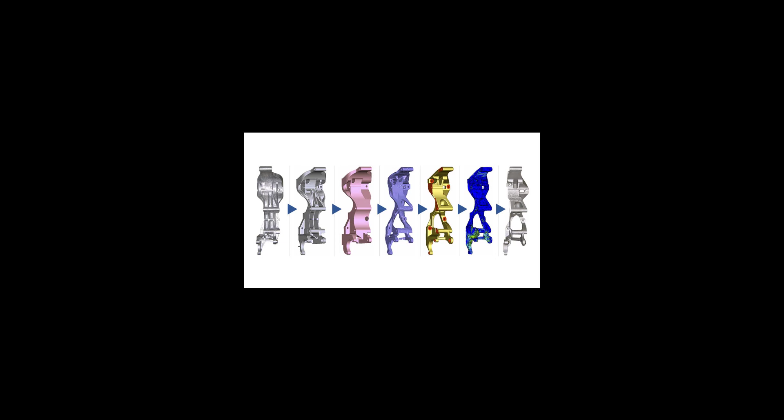Whether we're talking about a family car or a race car, a commercial jet, or the next rocket to the moon, weight plays a vital role in engineering. In most every possible design field, products and systems benefit from weight savings. Pounds taken off of a car mean more miles per gallon, or volt. A few ounces can be the difference between taking home the checkered flag or watching the celebration from the pits.

Weight off an aircraft means more paying customers or cargo, and a single gram taken out of a spacecraft means a cost savings of $1,000 or more. Even in everyday consumer products, an optimized design uses less material and thus is more environmentally friendly and can even cost less to build.

Altair introduced topological optimization with its OptiStruct solver in 1994 and won Industry Week's coveted Technology of the Year award. In the 28 years since, Altair's optimization tools have been the gold standard in lightweighting that have been copied but never equaled.

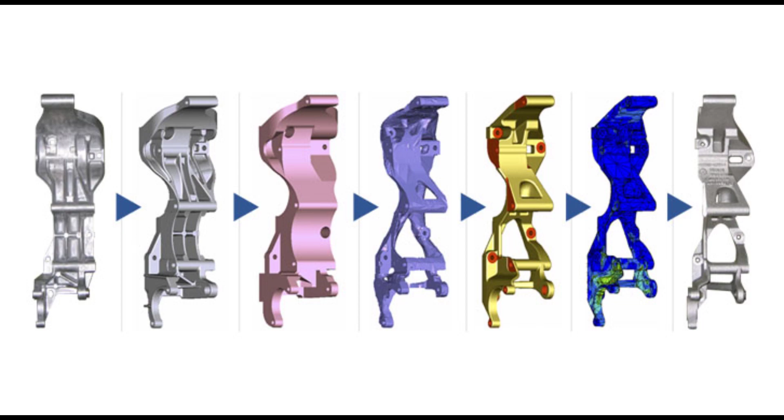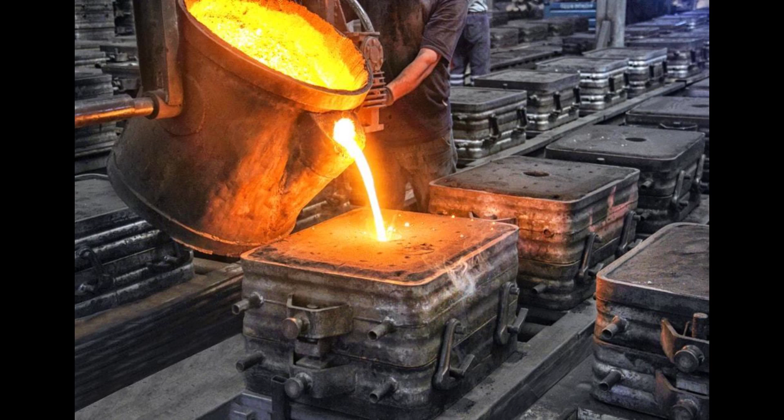The interesting thing about optimization is that it was a technology held back by the manufacturing techniques of the age. Design restrictions placed by manufacturing requirements meant the optimized designs were excellent and saved countless pounds of weight. But the true power of topological optimization was quietly waiting to be released.

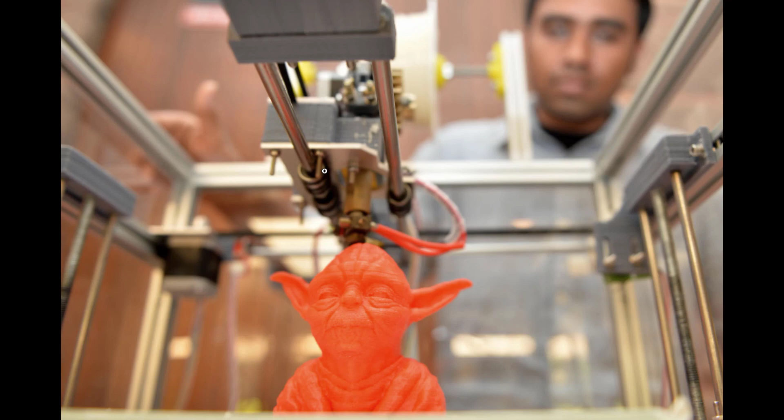Fast forward to the early 2000s, and 3D printing, additive manufacturing, is seeing its heyday. From the early days of FDM Yoda heads and embedded gear systems coming out of desktop 3D printers, to modern-day titanium SLS printers, additive manufacturing has finally unleashed the true power of topological optimization.

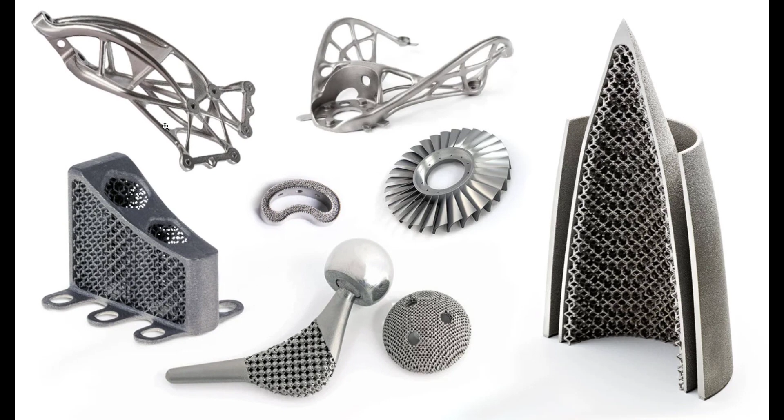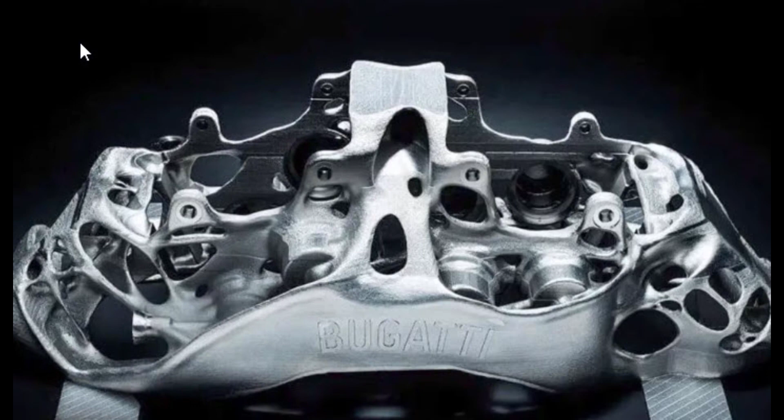Finally, the organic and revolutionary designs coming out of Altair's optimization codes could be realized in metal 3D prints that could never have come out of traditional manufacturing technology. As 3D printers became larger, faster, and more technologically advanced, you will be able to see more and more optimized parts in everyday products, on the roads, in the skies, on the trails, ocean, deserts, and even in your homes.

So now that we have an understanding of what optimization is, and why it's critical to the engineering process, why don't we take a look at how we go about doing optimization? Now this is just going to be a demonstration. We're not getting into the specifics of the utilization of the software.

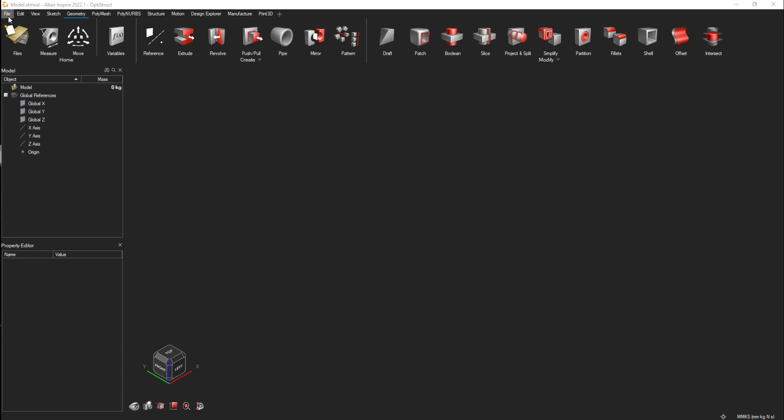In fact, let me come here and open up a model. So this is going to be the part that we're going to optimize. And you see it's just coming in as geometry, and we can support any of the geometries that are out there, all the popular CAD systems, the intermediate formats like Step, Parasolid.

And we're going to take this part and run it through a quick analysis just to see that this is a part that could be optimized, a better design through optimization. And then we're going to walk through the steps to do an optimization. So this is an aircraft door hinge bracket. This is an A380 part.

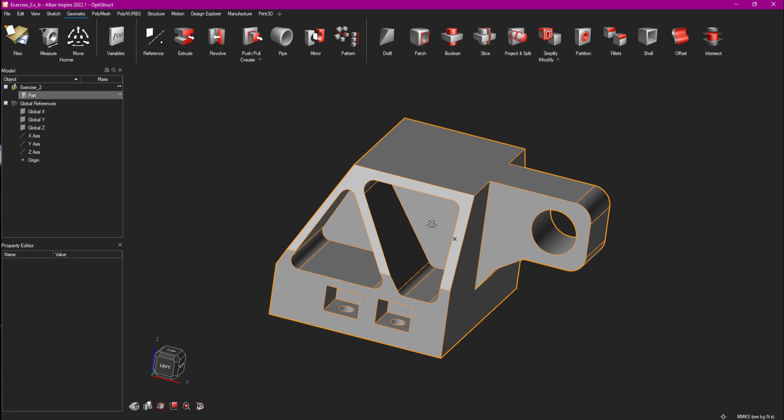And its job is to attach, two of these attached to the frame of the aircraft, two of them attached to the door of the aircraft. And then attached to this little cylinder here is the actual aircraft door hinge, which allows the door to open and kind of lean out and lay against the side of the aircraft.

So needless to say, it's an important part. And as with anything aerospace, weight is everything, and we want to make sure our parts are as light as possible. But also important to aviation is, of course, reliability. So we want to make sure the part is survivable. It will achieve whatever goals we're looking to set for it.

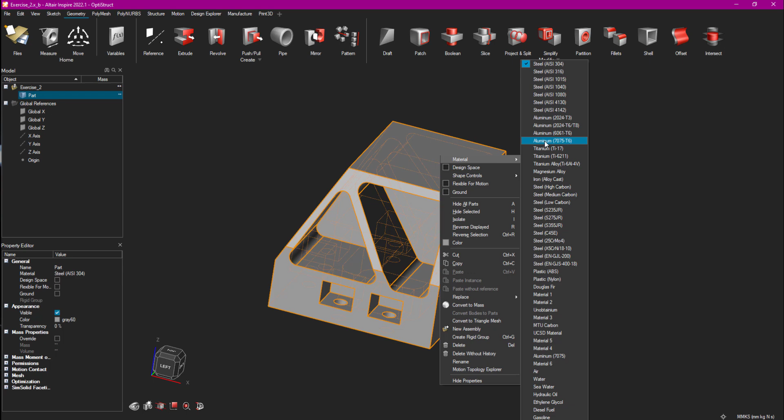So if I want to take this part and see where we are right now, what the status of the design of this part is, I can very easily do that in Inspire. The first thing I'm going to do is assign a material to it. We have an entire list of materials here. I'm going to select one. We can add materials as well if we so desire. But I'm just going to select aluminum 7075 T6, a very popular aviation grade of aluminum.

And we can take a look now and see what the mass of our part is. We're looking at about 1.5 kilograms. If we wanted to see that in pounds, we could just very easily change our unit scheme, and now we can see it's about 3 1/3 pounds. We'll stick in metric units. But changing units within Inspire is very easy. It's just coming down here to this little selection down here.

Units actually can be one of the more difficult parts of doing any analysis or optimization, making sure you have consistent units, and Inspire makes it easy through these easily accessible unit schemes down here. And the nice thing about it is I can switch those units at any point in time, and any of the materials, the loads, size of the part, all of that will just adjust to the new unit scheme. Nothing will physically change on it. Anything that is a specific size or a specific load will now just be represented in the new units. It'll be the exact same size of part.

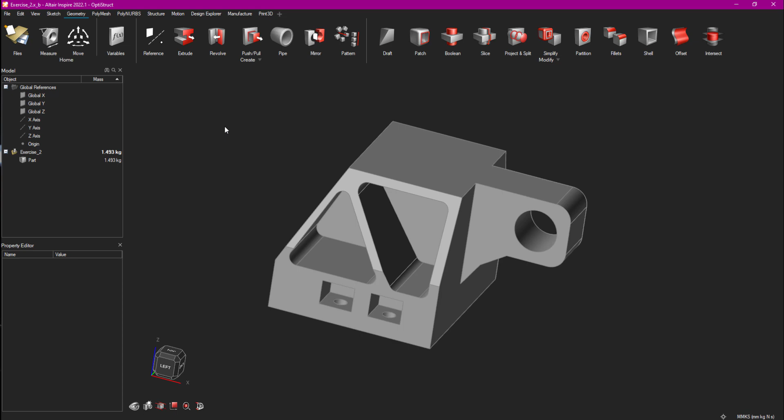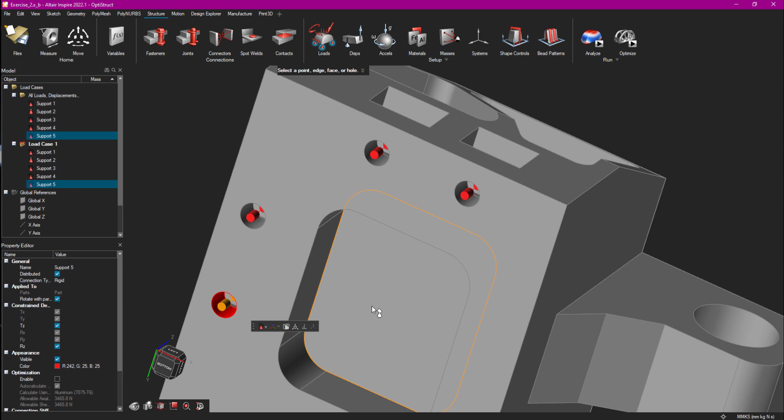So I'm going to come here, and the first thing that we need to do is hold this in place, and I'm going to do that through the use of what we call constraints or supports. I'm going to select these little holes here to represent this as if it were bolted to the aircraft structure. So that's what you're seeing here, these little constraints. And what they do from an analysis standpoint is they hold the part in place.

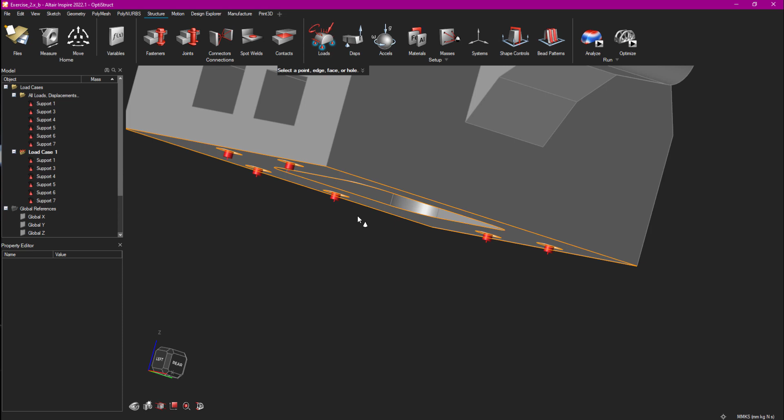Looks like I accidentally ended up with one somewhere else. Need to find out where that went. There, this one right here. This is not right, so let me just get rid of this one. There we go. Okay, so we have our 6 bolts in place. It's important to the analysis because the part does have to be held in place. If we put a force on something that's not held in place, it would just kind of fly off.

So I've got those bolted in place, and now I'm going to add a force to this. I can add a force to a surface, to a point, to a line, anything that I want to apply it to. I'm going to put it at the center of the hole here. Where did it go? It did not go in the center of the hole, so let me get rid of that, and let's select this again. There we go. Now we've got our force there. So it's this little force marked with an F, and I can orient that in any direction I want.

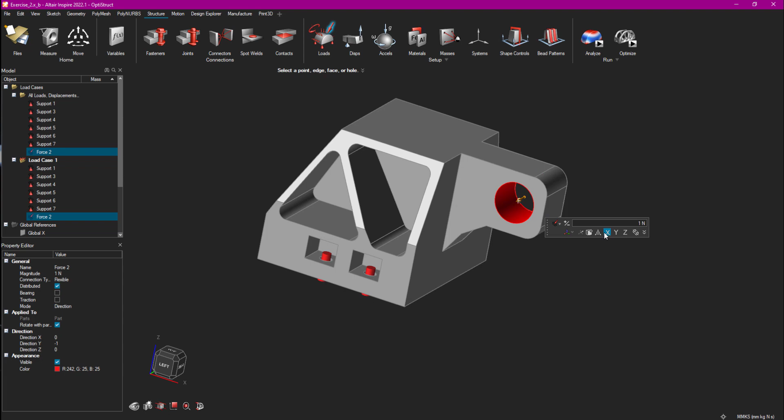I can even come here and rotate it, move it in any direction that I want, but I just want this to be pointing in the negative Y direction. And we'll give it a value here. I'll say 2,000 newtons. You can see it tells me in advance what the unit of force is. So I make sure I put it in terms of newtons, and now I have that force here. What I want to do, though, is analyze this with multiple loading scenarios. So this is going to represent a situation where the door is open and 2,000 newtons of force are going to be pulling on that hole.

Put another force on this, put it on that same hole, and I'm going to put this one in the positive Z direction. Now, say for instance, I knew this to be 500 pounds of force. I didn't know what it was in newtons, and I could probably relatively easily convert that. But a nice thing about Inspire and the unit systems that we use here, I can type in 500. If I were to click enter now, it would just be 500 newtons.

But if I type in LBF for pounds force, knowing that it wants it in newtons, it automatically does the conversion for me. So a nifty little trick that we can use there.

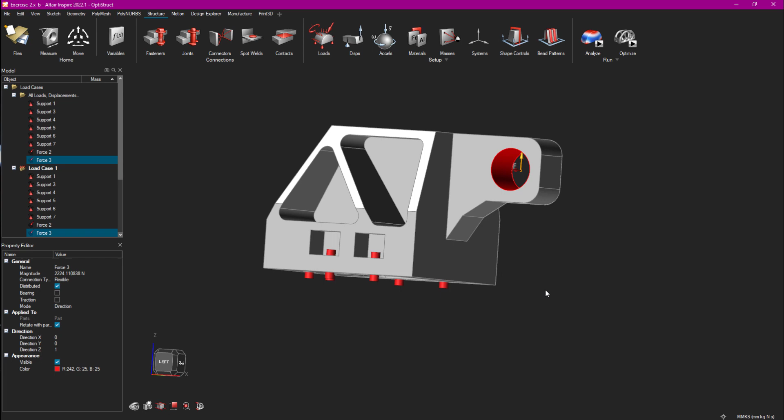So now I have these two forces. As they're set up right now, they would act simultaneously, which would of course be a bad situation. I can't have the door open and closed at the same time. These two forces will never act together. So the way that we handle that is through a process called load cases. Load cases are different studies that we want to do on the part. They'll be done in the same geometry. They'll be done in the same analysis, but the forces won't apply at the same time.

If I add another load case here, I can then just kind of go through and select the supports that I want. So what constraints do I want to use, and then select the force that I want, and I'll deselect that there. And now I'm going to get two entirely separate results out of the same analysis run, which makes things very easy. It means I don't have to create multiple models, run it multiple times. It'll all happen at the same time.

I can continue to add load cases as I want. So say for instance I want to simulate a situation where these two bolts have failed, so I just won't select them, and then I can pick a force, and I can continue adding different loading scenarios. Even with different types of loads, you see we have a temperature load that we could add, but I'm not going to do that in this one. But we can continue to add as many different load cases as we want.

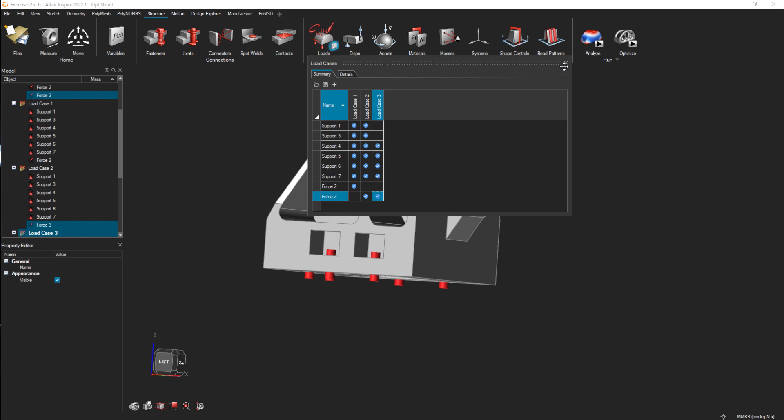And now that's done. It's ready to analyze. I've got my two loads on there in two different load cases, so we'll get two different results. I've got my constraints in there, so now all I have to do is come over here and actually analyze the part. I click the little play button. It opens up my analysis window. I can name this whatever I want it to be. So we'll call it,

bracket study. And another nice thing about Inspire is every time I do an analysis, it's saved within the model. So I could call this bracket study 1. And if I wanted to study it with a few alterations to the model, I could do that and then call that one bracket study 2, and I'd be able to compare the results between the two of them. So a nifty little way of studying different type scenarios.

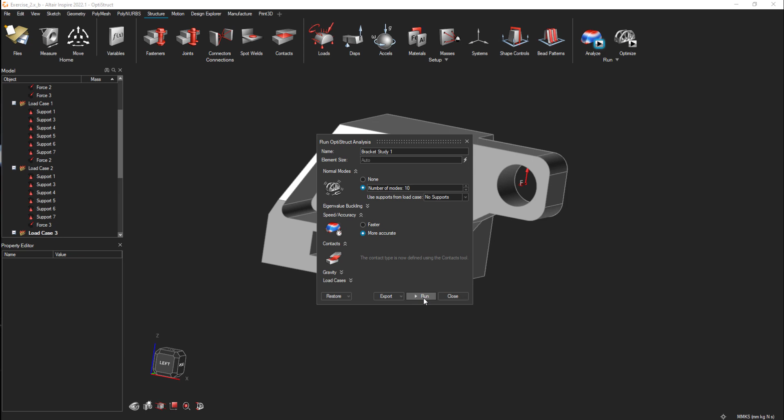Another thing that I could do is I could get the normal modes off of this. So if the modal frequency of the part were important to me, all I have to do is click that, and it will automatically go through and add all the necessary information to do a modal analysis as well. And then it's just a matter of clicking run.

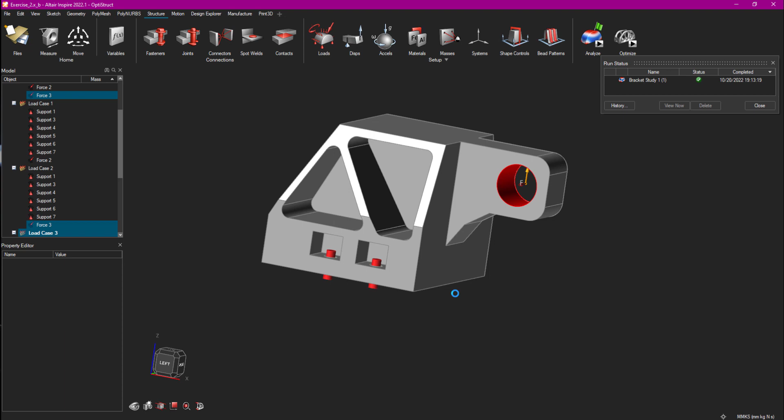Now what will happen, and some of the true power behind Inspire, is it is utilizing our enterprise level softwares to do the meshing in the background. You see I didn't have to do any form of meshing myself. That'll all be handled automatically for me, and then it's going to use our OptiStruct solver to run the analysis on this. So while it was incredibly easy to set up, I can rely on the results because it's using a tried and true analysis tool that we've been developing for close to 30 years. So even though it was deceptively easy to do, we know the results are going to be correct. And from here, I can now just take a look at the results.

I can come up here, I can animate it so I can see how it deforms. Now the animation is actually scaled up. Let me slow that down a little bit. There we go. So that's a little bit slower. The animation is automatically scaled up. You can see the actual deformation of this part is incredibly small. We're at 5/100ths of a millimeter there, so very small. So it's scaling it up just so I can see how it behaves. If I were to go and change this, which would be very easy to do, to 1-to-1 scale, we wouldn't see any deformation at all. You'd have to really zoom in to see it moving.

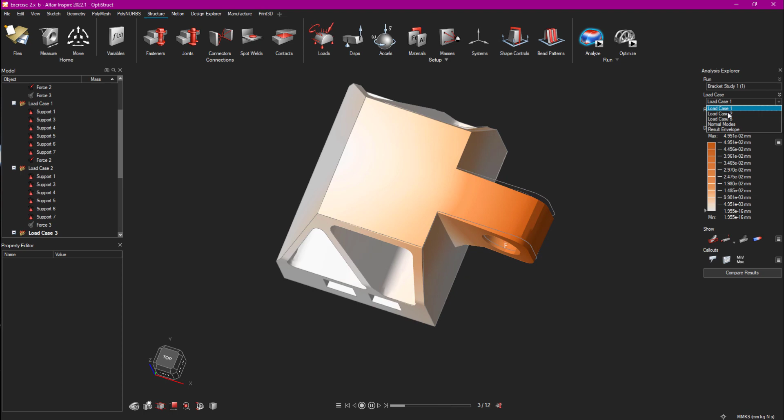So that's why we automatically scale it up. And I can take a look at the two different load cases, or three different load cases. So this is the other one and how it deforms there. And then the one where we simulated the two bolts failing. So we get that, and obviously substantially more deformation there.

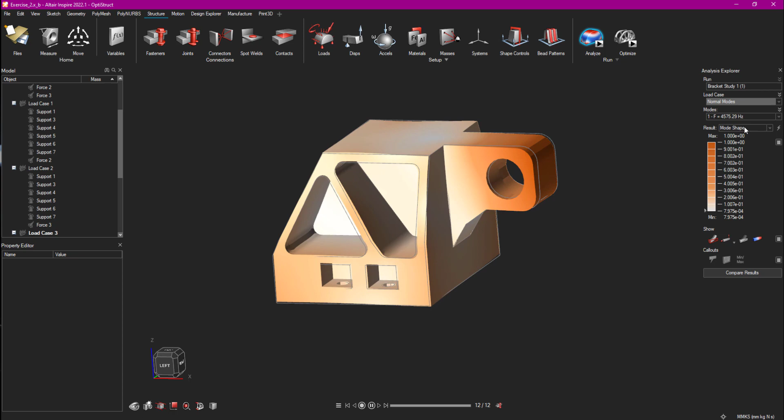And finally, I can come here and take a look at the normal mode. So it's telling me that the first natural frequency of this is 4,575 hertz, and this is the way that it will vibrate. And I can take a look at the first 10 of those frequencies. They get progressively higher and higher, and progressively more and more complex.

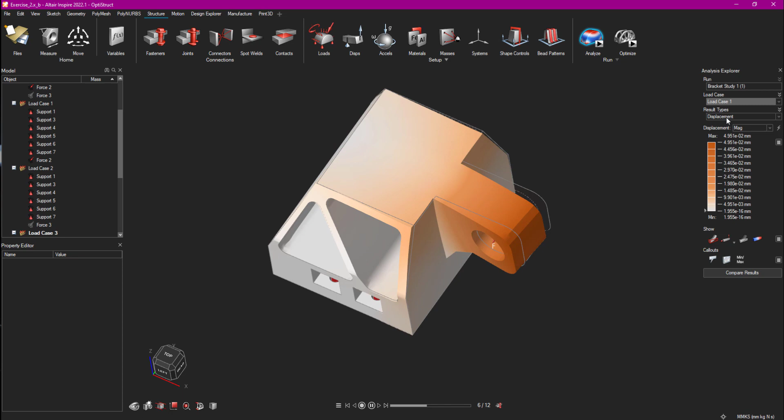But what I really want to look at is the stress on this part. So I can go back to my initial load case, and I can come down and take a look at my von Mises stress. The blue is low stress, or stress that's below the yield point of the material. The white is going to be stress that's right at my yield point, and anything in red would be stress above the yield point. So you can see it's very, very low stress on this part,

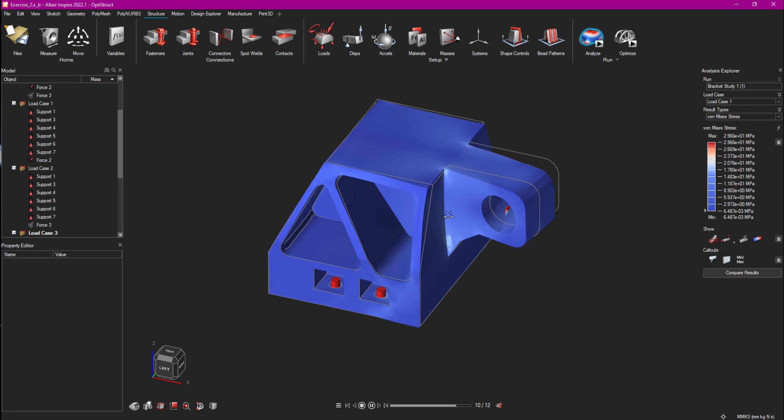and in fact in both load cases. The majority of the stress we're seeing is actually down here right along the edge. This is artificially high stress. It's an artifact of finite element analysis. Anywhere you've got something rigidly constrained, it's going to artificially raise the stress. And the fact that it's just in a very small area tells me that it's an artificial stress.

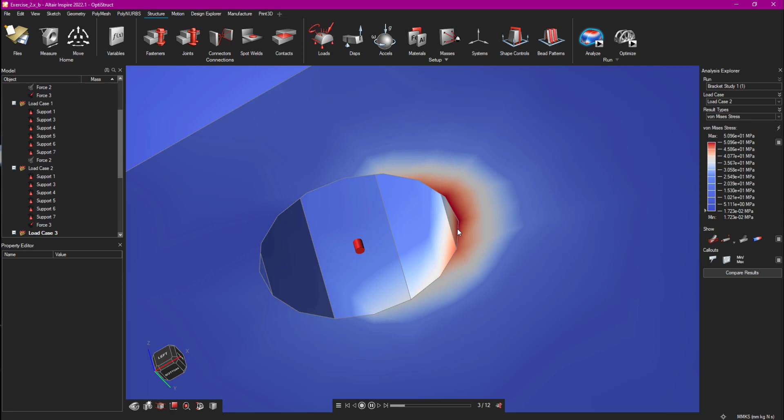In fact, I can even take a look at the mesh that it did apply to this, and we can see that stress isn't even coming out of the first element, which tells me that it's just an artificially high artifact of the mathematical process of solving this.

And then what I'll do is I'll actually change this to factor of safety. So this is the true telling of how well designed this part is, this factor of safety. Let me come back actually to von Mises stress. I can use these little arrows here to filter out things that are above or below a certain value, so we can see where the highest stresses are. And if I come back to my factor of safety, you can see that I'm above a 6 times factor of safety on the entire part in both loading cases.

So this part was designed well, but actually this part was over-designed. There is no scenario in which we need a 6 times factor of safety on a part like this. You think, well, hey, 6 times factor of safety, that's fantastic. It means this part's never going to break. But if every single part of the aircraft were made with a 6 or more times factor of safety, you'd be lucky if that plane would ever lift off the ground. It would just be way, way too much.

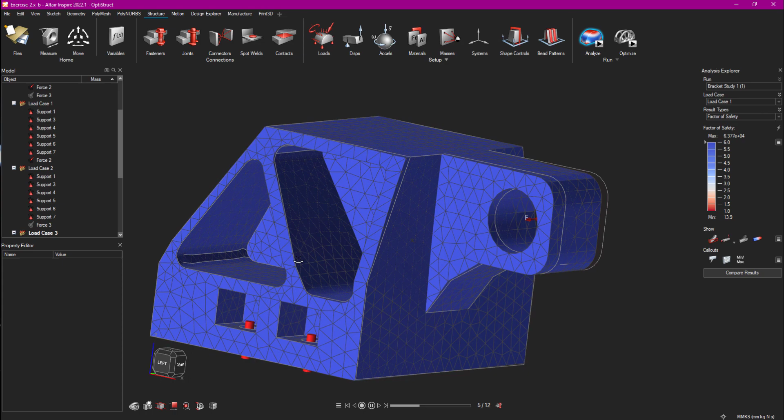You can see they attempted it with these little pockets that were put in here, the fact that this has been carved off at angles. They've reduced material usage, but, I won't say in a haphazard manner, they did it in a manner that's kind of common: you look for areas where there's not a lot of stress and you just take some material out of there. What we really want to do is utilize simulation in the design process.

Allow an algorithm, allow the science of the finite element analysis to help us better understand true material necessity. What material is truly necessary, what material is not necessary. It's just something that we can't do on our own. It's something that we need analysis to help us with if we truly want to achieve an optimized design.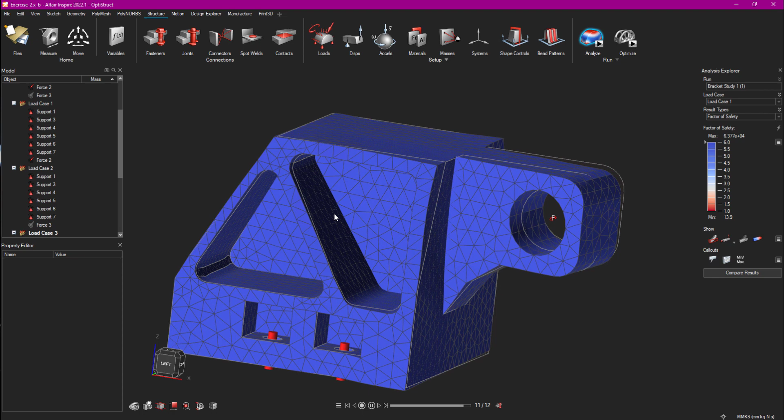So let us leave the results here. And now I want to prepare this for an optimization. And to do that, I actually do need to make some geometric changes to this part. So in the prelude to this, we discussed that optimization is like carving a sculpture. It's the removal of unnecessary material.

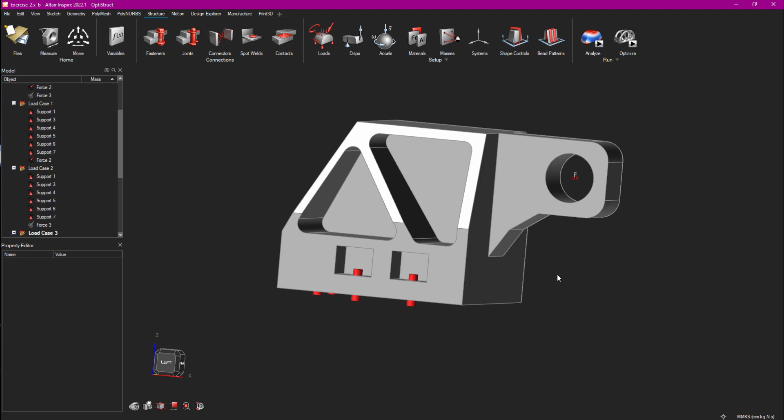But just like an artist would never carve a sculpture out of a sculpture that's already been carved, we don't want to optimize out of a part that has already been somewhat optimized, somewhat revised here. An artist is going to take a nice big block of material, marble, wood, whatever, and they're going to carve from it. They're going to pick a block of material that's large enough, but just large enough to fit the statue that they want.

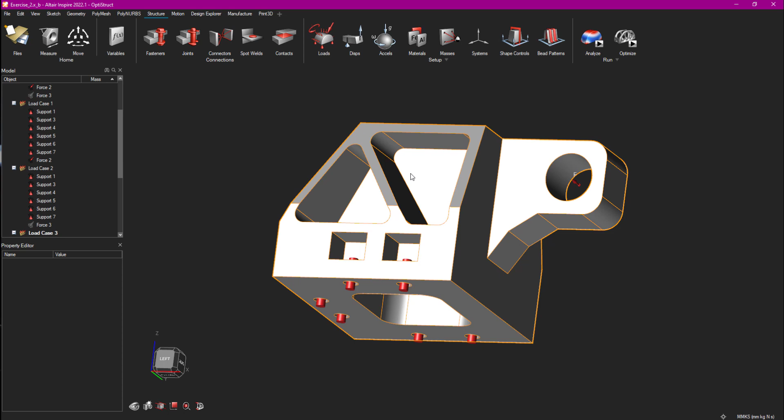And that's what we really want to do with this geometry here. We want to have a chunk of geometry that doesn't have all these little fine-tuned features on it, that the algorithm can then go and determine what of that material is necessary. And we call that a design space. And so what I'm going to do, and this could be done in a CAD package, but it's pretty easy to do here in Inspire, I'm going to come in here and I'm going to simplify this.

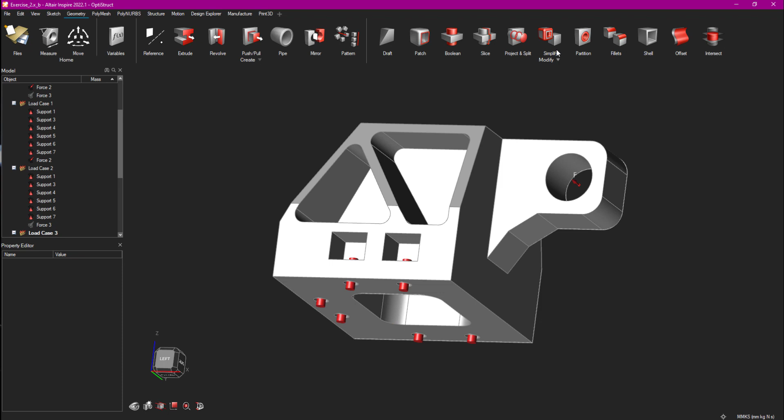The first thing I'm going to do is fill up some holes. If I double click on this, it's going to identify that pocket. If I click it again, that pocket goes away. And that's why, even though this could be done in a CAD package, in a lot of cases it's actually easier to do in Inspire because we have tools designed specifically for this. So I'll fill those in right there.

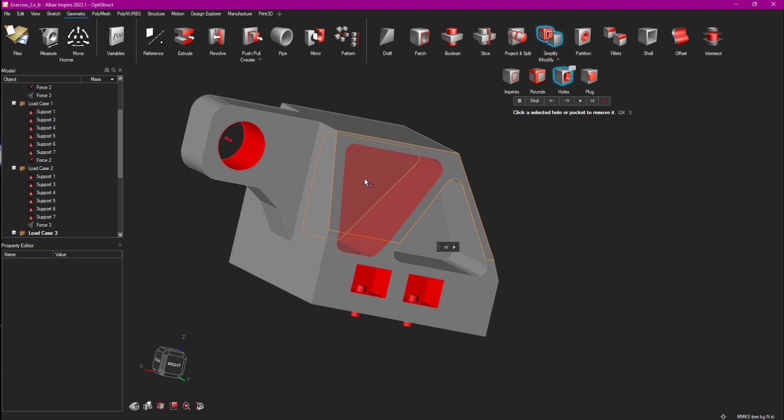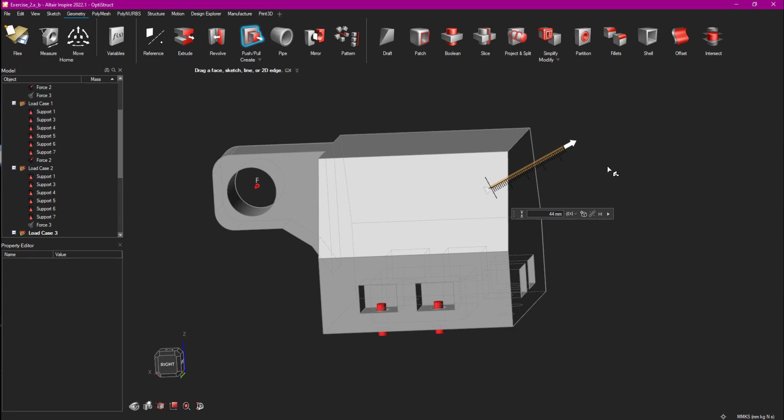Now, to deal with these angles here, I come to this tool here called push-pull. Push-pull is a nifty tool. I pick a surface and I can literally push or pull it. And if I keep pulling it all the way to the point where those two surfaces meet, I get that nice 90-degree angle there. I can pick another surface here and I can drag that out, and I can drag this out as well. And now we're kind of seeing where we want to be.

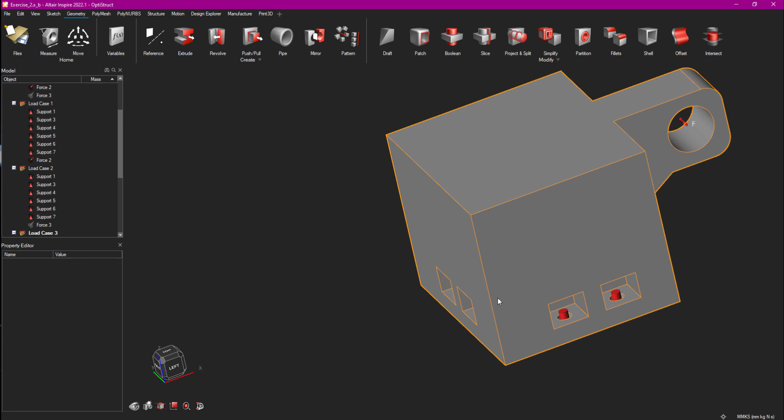We want a block of material, no fillets, no little fine tuning areas on it at all. Just a nice big block of material that fills up the volume that we can utilize in the design, but doesn't go beyond it. You see, I didn't do anything to fill in this area in here where we can't have material. It is going to remain like that because this needs some clearance for the hinge to clear it. So anywhere I don't put material, I won't get material.

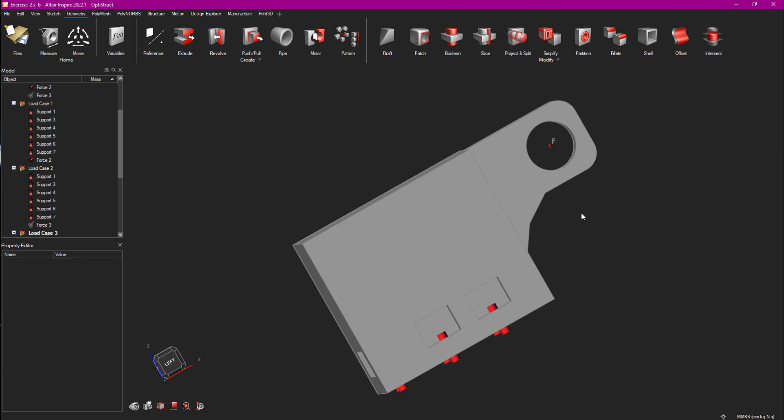Just like if I'm carving a statue, I can't end up with a statue that's larger than the block of marble that I began with. Optimization is the same way. It's 100% subtractive. Interesting, because ultimately we'll get into the discussion of additive, but it is 100% subtractive. So the maximum amount of material you can have is represented by the geometry, and then it will remove from there. So we just leave off the chunks that we don't need.

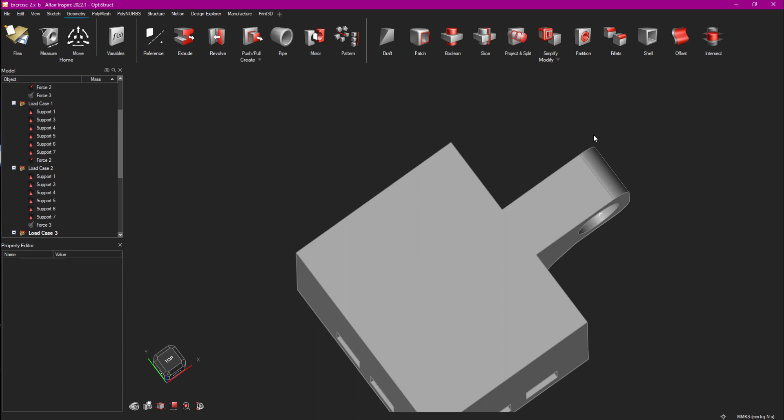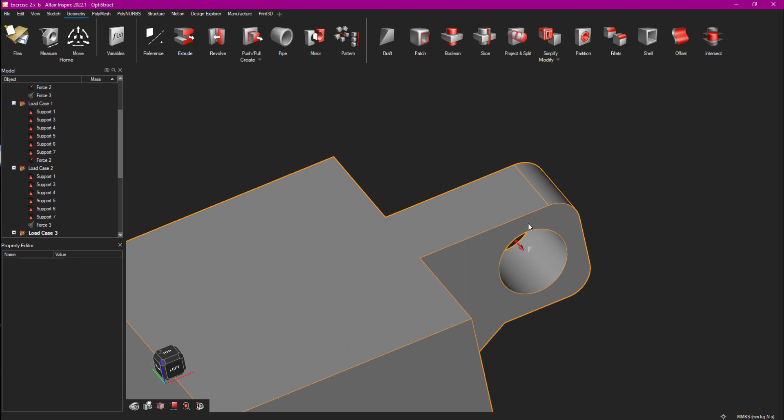Like these little pockets. I need these little pockets here because I need to be able to reach in with a wrench and grab the bolt. I need these rectangular areas removed so the hinge can fit around that, but the rest of this big block is subject to removal. And along those lines, there's a large chunk of material that we can remove from, but there are aspects of the design that are critical. For instance, I need this to be a perfect cylinder of this size in that location so that the hinge can bolt to it. I can't have the software removing material from that.

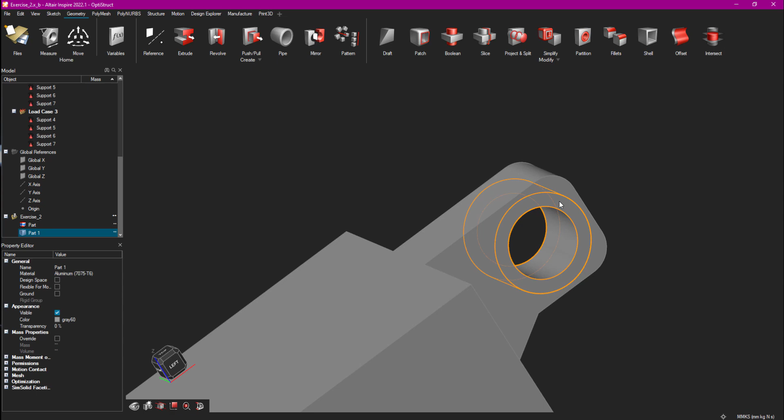So what we do is we partition that off. We create what we call non-design spaces. It identifies things like that. So I pick that hole. I tell it how thick I want that region to be. 5 millimeters will work fine. And now this is an entirely separate chunk of geometry. So when I right-click on my main part here and I say this is design space, now the big red area will be that material that can be sacrificed, that the solver will determine what is necessary and what's not and get rid of what's not, but it won't touch this.

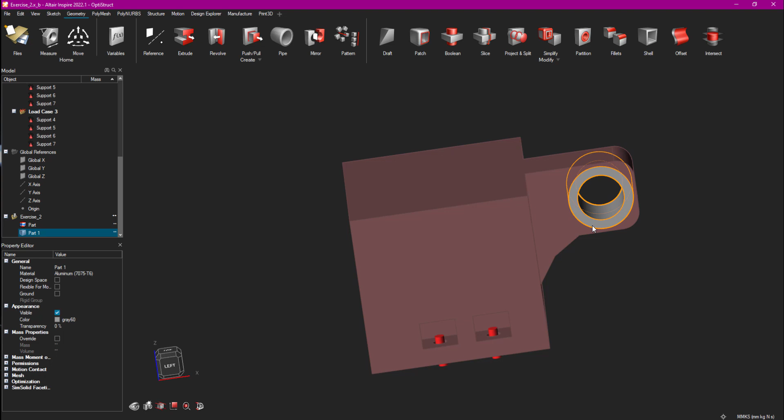So I'm always guaranteed of having that nice cylinder there for the attachment. The same thing with the bolt holes here, so I could come down and select this. Now I don't want it to protect that pocket. The fact that that pocket is there is all I care about, to make sure I don't have material there, but I don't need it to remain this perfect little cube.

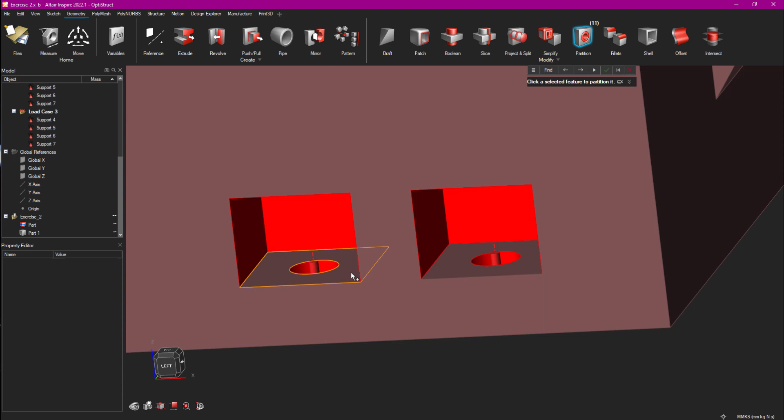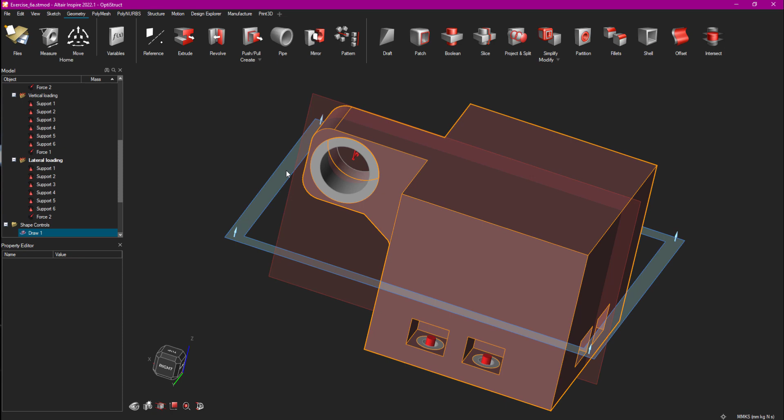So what I can do is I can take off those two surfaces there, and then when I pick these two cylinders, I'll get that, and then I would continue on and do that around the part. But in the interest of time, it's a little repetitive. Let me just kind of cheat here, and I'm going to come up here and grab this part. Let's get rid of these right now because I don't want to discuss putting those on there.

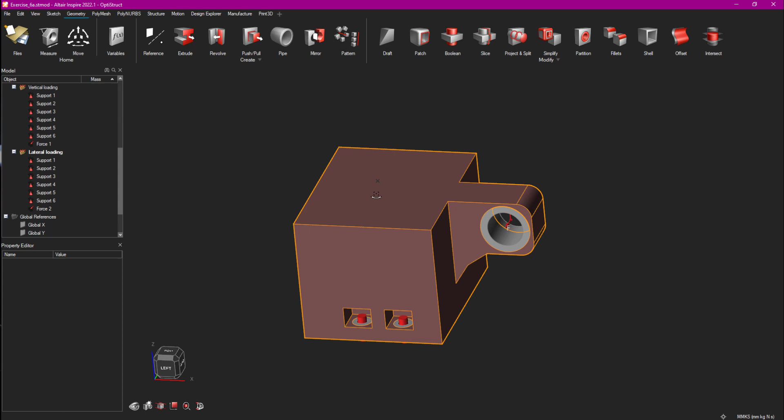So now you see, we've got that cylinder maintained with our forces in it. We have our bolt holes maintained. And now this is an ideal part for optimization. But the things that I got rid of initially, I got rid of them because I wanted to talk to you about what they represent, and that's back here in the structure, and shape control. So when we were in the preliminary portion of this, we talked about different types of manufacturing. This is where we would incorporate that.

So if I need this to be a drawn part or a split drawn part, which is either a casting or a stamping, with this little image that appears, we can kind of see what the difference would be. If it's a single drawn part, it's going to guarantee that all of the material goes in the direction of the draw. It makes sure I don't have any undercut areas or any holes, so that if I'm casting or stamping this, I could remove it from the cast, or I could remove it from the stamping.

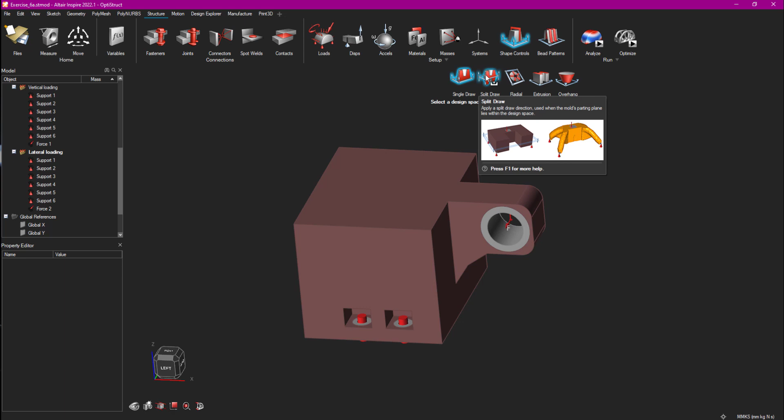Split draw is similar to that, but it allows for a draw in two different directions, which means I can have things like these little legs sticking out. Extrusion, we talked briefly about that. Extrusion is where I've got a constant profile going through the part. So these are the three main manufacturing techniques that we can incorporate into our optimization to try to make sure that the part maintains a structure that allows it to be manufactured in a traditional sense.

But this is where technology has kind of caught up with manufacturing and optimization. Optimization has been around. Like I said, we introduced it almost 30 years ago. But at the time, it was all standard manufacturing processes. We didn't have 3D printing or additive manufacturing. Additive manufacturing is kind of what optimization has been waiting for.

Optimization comes up with incredible designs, but left to its own devices without incorporating these manufacturing processes, they just plain out couldn't be made. But additive has changed the game, and that's why additive is kind of the manufacturing process of the future. Additive allows us to have the optimization code do its thing without the restrictions of manufacturing. Because with additive, we can make just about anything. You've seen 3D printed parts of something encapsulated in something else, or entire designs that have an entire internal structure with them. That's the way that manufacturing is going.

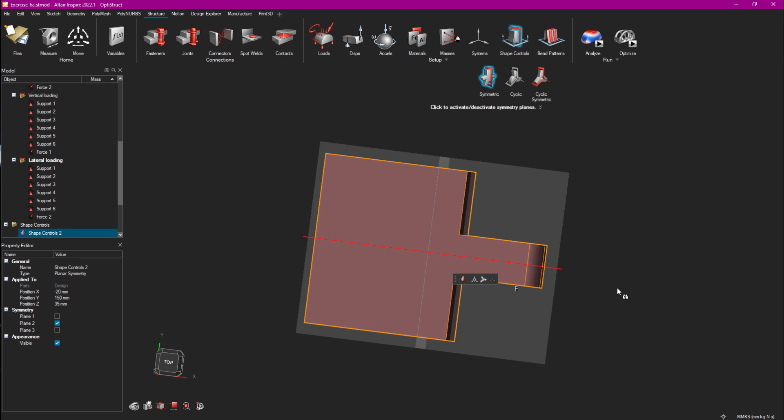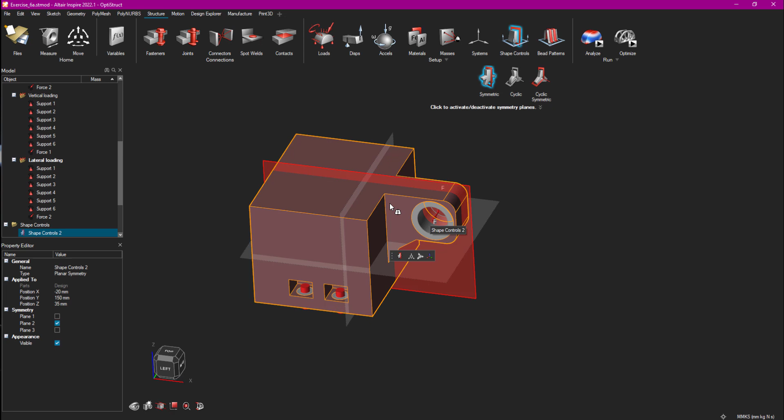And it allows me to get a part that's universal. If I did not include this, you can see we're just looking at a force in this direction. It would optimize it, taking care to place material to take into account that force, which means that we'd end up with a part that's not symmetric. And if I were to flip this part over and the force would be running in the opposite direction, this part would not be properly optimized for that direction.

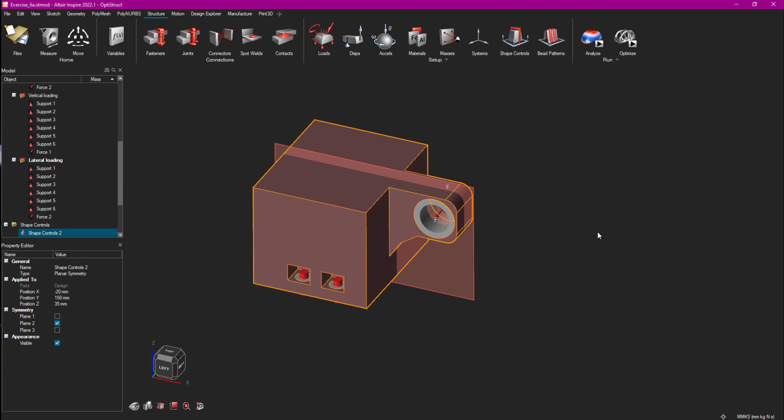By putting a plane of symmetry in there, whatever it does to optimize for this load on this side, even though it normally wouldn't want to do it on that side, it's going to be forced to make a symmetric universal part. So we can take advantage of some of the constraints, the controls, to guarantee that we have a part that is universal or can be used on either side of the aircraft in any orientation.

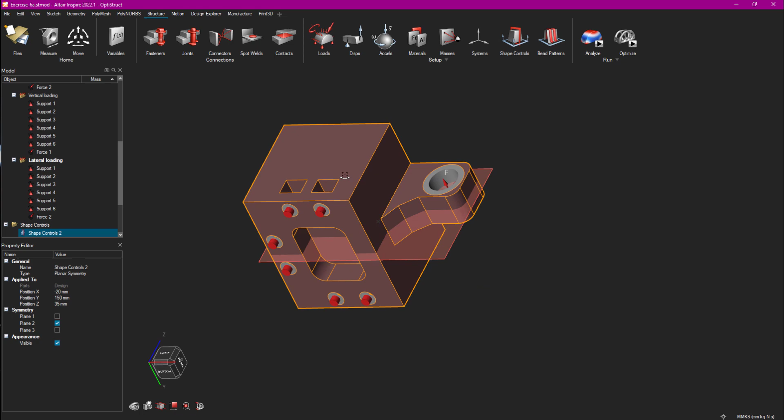And that's it. It's ready to be optimized. This big red area, anything that you're seeing in red, can be carved away if that material is not necessary. Anything that's in gray will be maintained. So we're going to have our nice cylinder there and our bolt holes. Now we just go to the optimization. When we do an optimization, we have to have an objective. What is our goal? And yes, I realize that our goal is to lightweight the part. But in the process of doing that, there are some other considerations we might want to make.

For instance, this maximize stiffness, the first and most commonly used optimization technique. What maximize stiffness does is it optimizes the part to be as stiff as possible. But left to its own devices, if we didn't tell it otherwise, the part you're looking at there that is utilizing this material is as stiff as possible. But we want it to be lighter weight. So what we do is we set a mass target on it, a mass target of 30%. What that means is this big red area, I'm telling the software, you only get 30% of the mass of this big red area here. And whatever 30% you use has to be oriented in such a way that it maximizes the stiffness of the part.

30% is the default. It's just something after decades of doing optimization we've determined is a good starting point, but it doesn't necessarily mean that's going to be the ending point. If it comes out still too over-designed, we could reduce that volume. Or if it ends up too weak, we can increase that volume. We can also incorporate frequency constraints to maximize the frequencies or set a minimum frequency if that's something that's important to us, and quite often it is. In this particular instance, I'm not going to utilize that, but it can be incorporated in there.

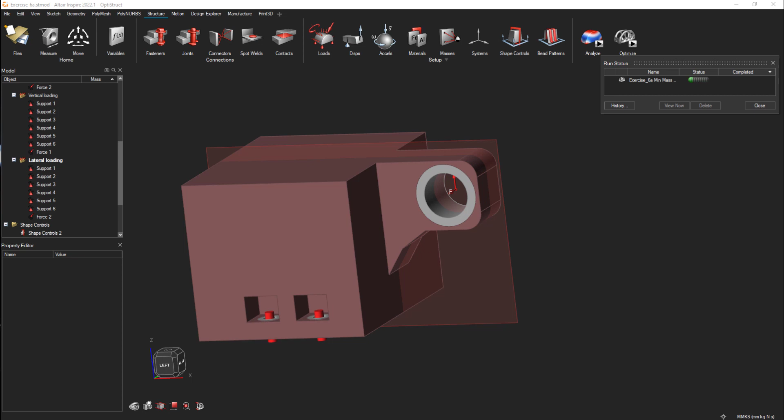And it will go through and run. Now this is going to take probably about 5-7 minutes to do. So what we're going to do is just pause here, and we'll bring you back when the analysis is complete. So just like that, through the magic of editing, the analysis is now complete.

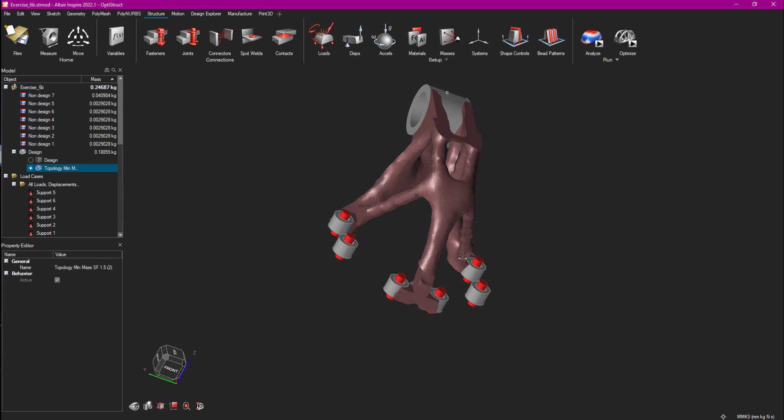You can see we have a topology choice over here, and if I select that now, we can see what the solver has determined as the optimum placement of material. And you can see that this is not a part that we would traditionally be able to engineer on our own. This is way outside of what we can kind of imagine as engineers. And it is an optimal usage of material.

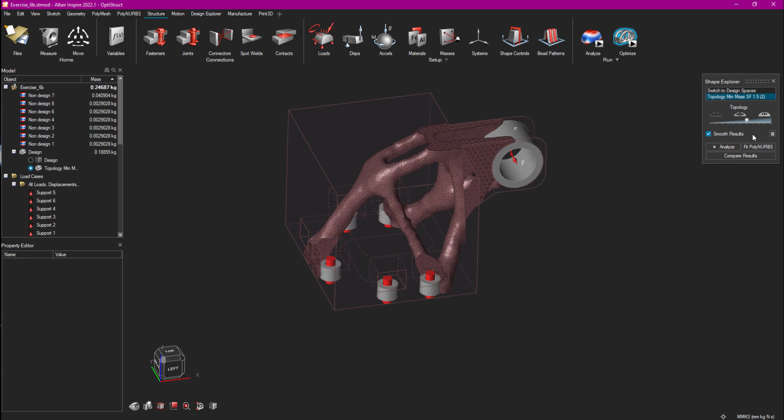What I can also do with this is if I feel it's a little bit under-designed, I can add a little bit more material to it, or I can subtract material away from it, and we can end up with a truly optimized part. And you can see this is not something that I could traditionally cast. There's holes running through it in multiple directions.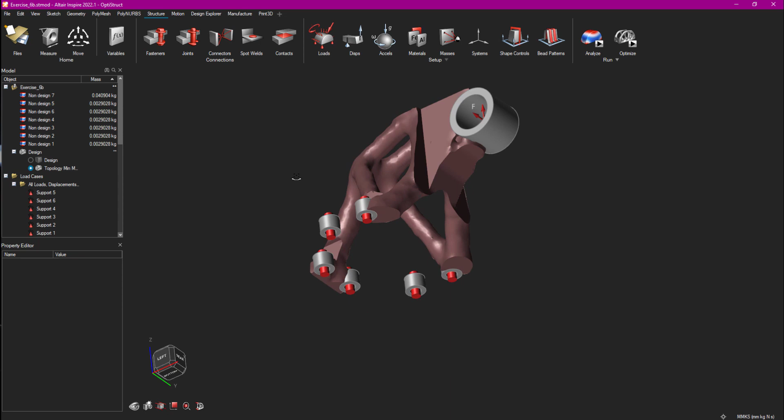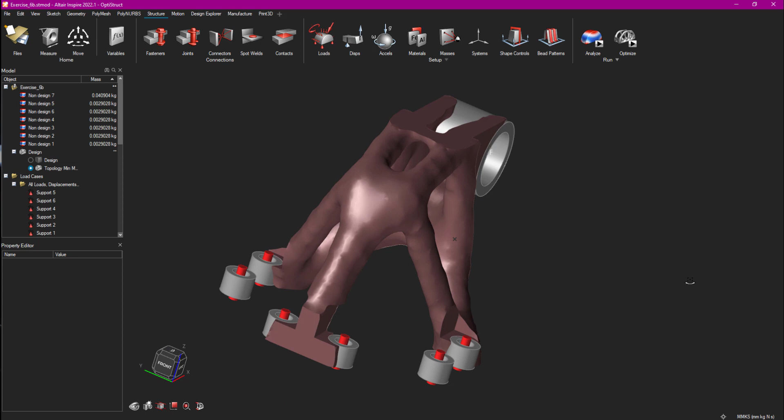I couldn't stamp this. This is why additive is what optimization has been waiting for, because this would be an incredibly simple part to create through an additive process. I'd have to have some supports here or something like that, but that's kind of the nature of the business when we're talking about additive. But this is the best, most optimized version of this design that's possible.

One thing you may have noticed right off the bat is it has abandoned these two bolt holes here. That's not uncommon, especially when doing a stress-related optimization. In this case, what it has determined is these two bolt holes don't contribute to anything; connecting to them doesn't contribute to reducing the stress on the part.

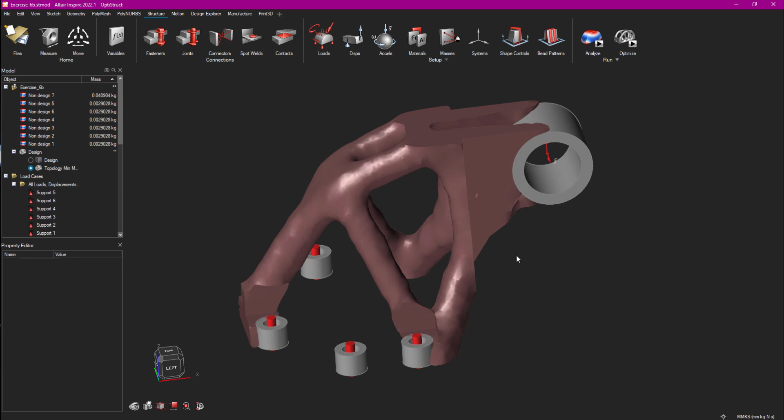And we can kind of see if I'm pulling up here, it's going to be between these and these. These middle ones really wouldn't be doing anything to stress, and if I'm going sideways, it's going to be these and these that are going to be reducing the stress. These really don't contribute to it.

But maybe this is an aviation part. Maybe the FAA requires that we have 6 bolt holes for every door hinge bracket. I could rerun it, add a little bit of a force here that would force a load path through and it would connect it. Or, optimization in this case isn't telling you this is exactly what the part has to look like. This is telling you this is how the material should be distributed to guarantee that the least amount of material is utilized.

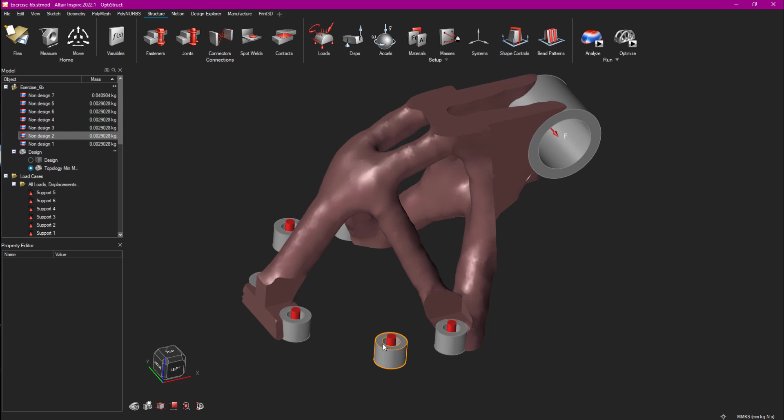But I could engineer in myself some sort of connection. Maybe I could connect it around this way, or bring down kind of like a V shape here, or another arm coming down. I can take this back to my CAD, and that's really as simple as just coming back to here, clicking Fit PolyNURBS.

Before I do that, though, I do want to double check this. So I can very easily just click Analyze. It's going to take my design as I've got it right here. It's going to apply those forces and those constraints to it, and it will allow me to make sure that this part, as it has been optimized, achieves the goals that I've asked it to. And this should be a relatively quick analysis here, and it will act as a double check, a final check to make sure that the optimization did what I wanted it to.

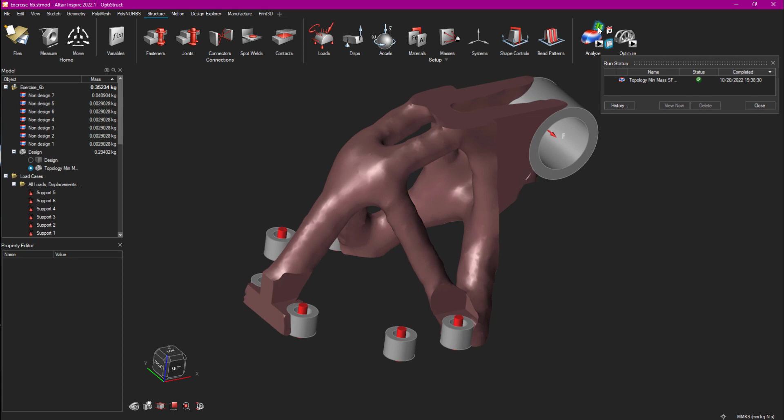So as quickly as that, I can come here. You can see we have increased the displacement. That's not surprising. The part does not have as much material, but it's still an incredibly small displacement.

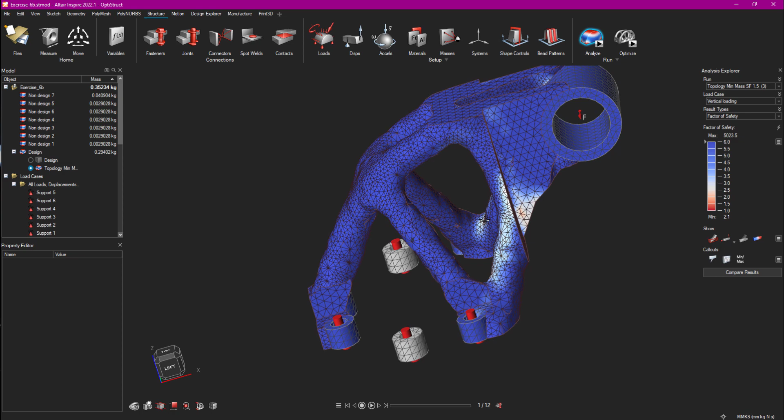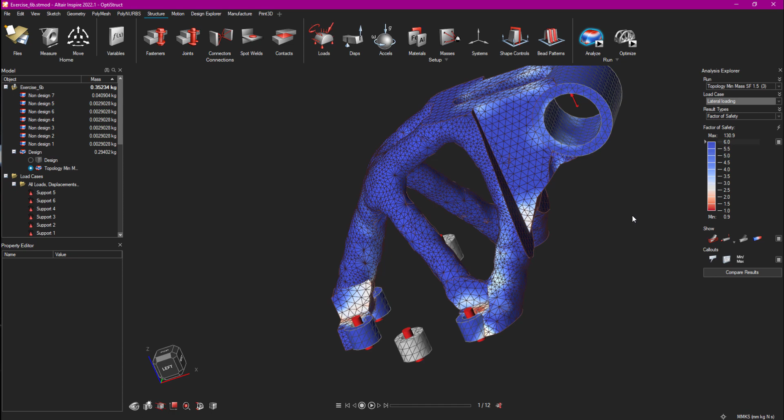But most importantly, if I come here to my factor of safety, you can see the factor of safety has gone down. I have regions that are not 6, but if I drag this all the way down, I've actually got a 2 times factor of safety on this, and if I come to my lateral loading, I've got just under a 2 times, or right around 1.5. So I have achieved my goals. This part will meet the requirements that I have set forth on it, just meet them, which is fine.

The reason I set a factor of safety is because that is the minimum that I want. So now I have the minimum amount of material necessary to achieve the factor of safety that I'm looking for. And you can see through this, I have actually reduced my part from 1.5 kilograms down to 0.35 kilograms. It's less than a third of the mass that it was before.

And what's that mean to me? Well, it means, first of all, if 4 of these are going on every door, that's 1.1 kilograms per part. So that's 4.5 kilograms of weight reduced for every single door that's on the A380. And I don't recall offhand how many there are, but there's probably a good 10 doors on that thing. So that's 45 kilograms of mass that's been reduced.

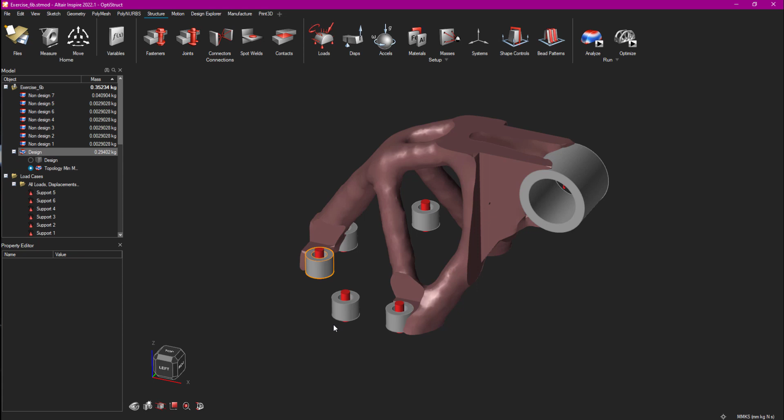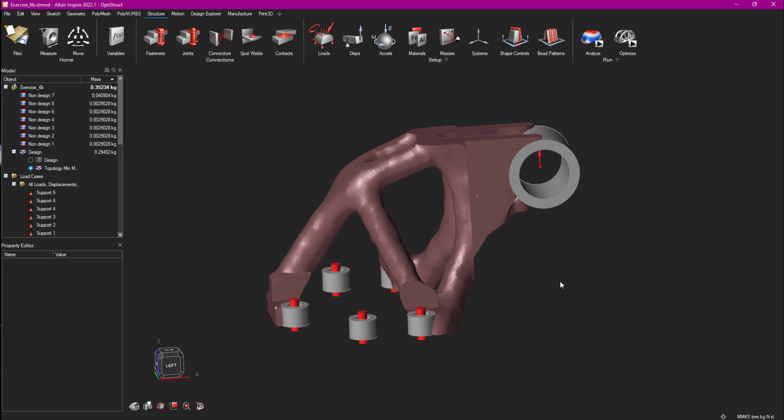I've reduced my material utilization in general, so the part is greener. It's using less material. I have less waste, especially if I'm looking at it in an additive process. So overall, the part is a substantially better design in every aspect, and that's what optimization does for us. That's the true power of optimization. Create an ideally designed part, something that I typically wouldn't be able to come up with on my own, and allow simulation to drive the optimization and the design of the part.

So what do I do with it now? I can double click on it, click this little Fit PolyNURBS button. What that's going to do is fit nice smooth geometry to this shape. Should only take about a minute or so to do. And once I have that geometry, I can save that out to an IGES, a STEP, or a Parasolid file. If I just wanted to go straight from here, I could even save it as an STL file, bring it into whatever my favorite slicer is, and immediately go to 3D printing.

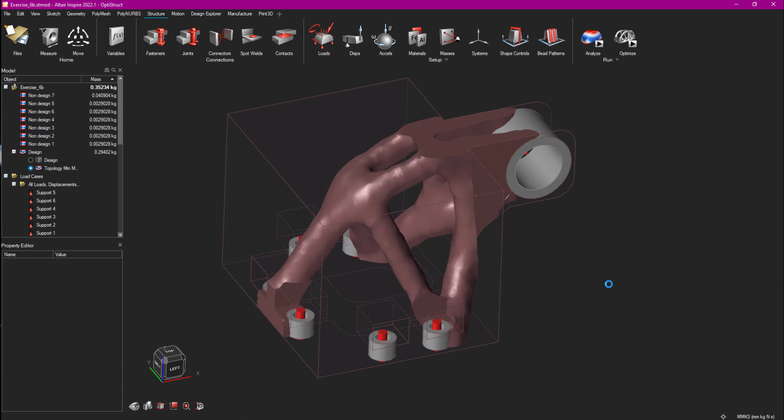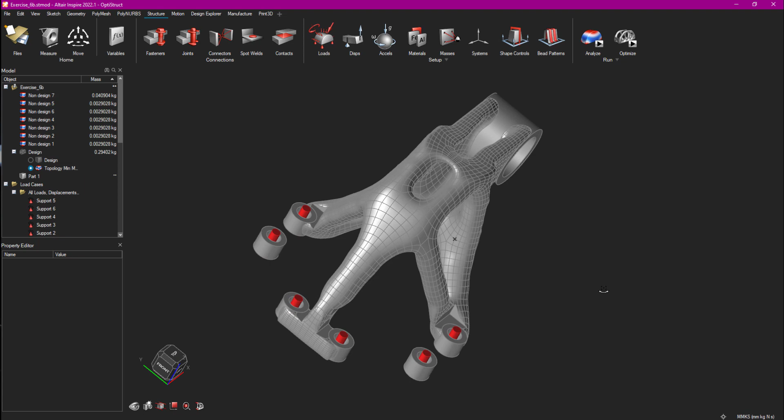So you see we have a very nicely designed part here. Even if I did nothing to it, this is a great part that could be very easily 3D printed. More than likely I'm going to grab this geometry, bring it into my CAD package and do a little bit of fine-tuning work on it, and then I'll have a fantastically designed part that is much lighter than it originally was. It's much better material utilization, and it is still a 100% safe part because it meets the requirements that I had. That's what topological optimization does for us. So that's kind of an overview of topological optimization.

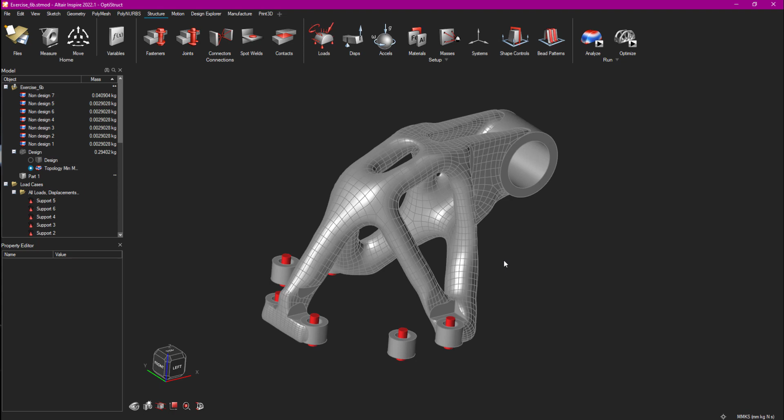It's a great tool, and I can't stress enough that optimization has been waiting for 30 years for additive manufacturing to come along and truly take advantage of an optimized design without the restrictions of traditional manufacturing processes. But they aren't going away anytime soon. Heavily used in aviation because they can do a lot of 3D printing. In automotive, they're still doing optimization, but they're having to restrict themselves to the traditional manufacturing processes. Additive manufacturing isn't there yet. It's a great tool, but it just isn't fast enough.

If you took the combined production levels of Airbus, Boeing, Bombardier, Embraer, all the different aircraft manufacturers, their yearly production is probably less than a single day production of any one automotive company. So additive still has a ways to go to be adopted in every industry. It will get there. We are, believe it or not, still in the infancy of additive manufacturing. But you're going to see a lot more designs that look like this, moving away from your traditionally orthogonally designed parts. Additive manufacturing and topology optimization are the future of engineering and design.